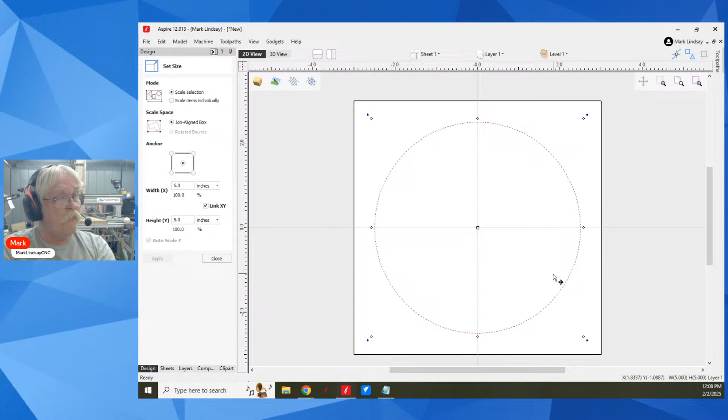He also said he wants to cut a 3/8 of an inch deep, 3/8 of an inch wide slot. So for you metric folks, that is about 9.5 millimeters, 3/8 of an inch.

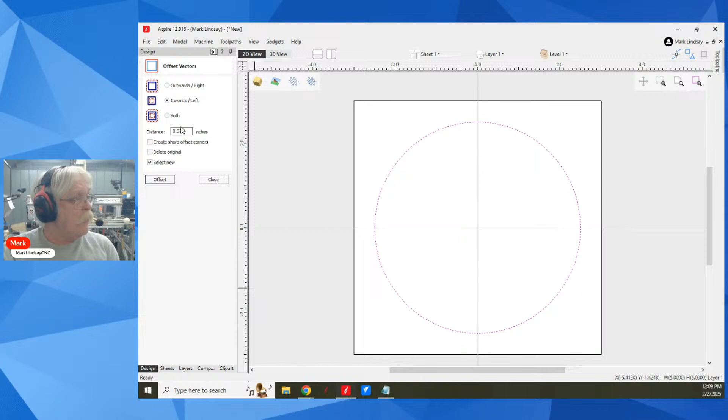So what I would do to help regulate and get my cut depth, I would offset this circle by the depth that I want to cut. Now, he wants to come in that 3/8 of an inch, so I'll offset that vector inwards by 3/8 of an inch, 0.375, and offset.

So that would be, this is going to be kind of freaky here, just bear with me. This would show how deep that slot is cut.

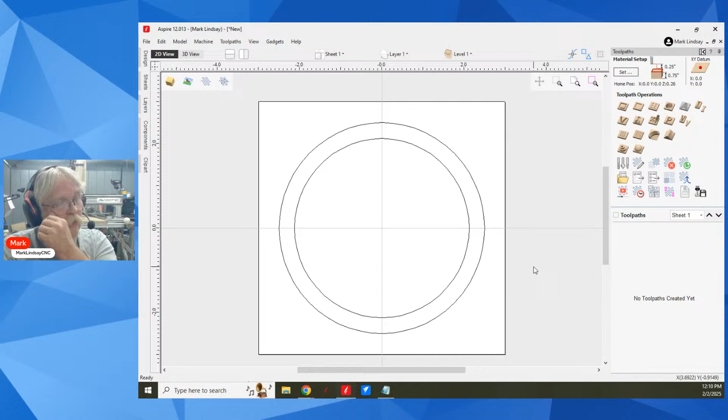So now we'll go over here and calculate two profile toolpaths. The first toolpath I need to run is a profile toolpath to cut this shape because I've got to cut it out of my material.

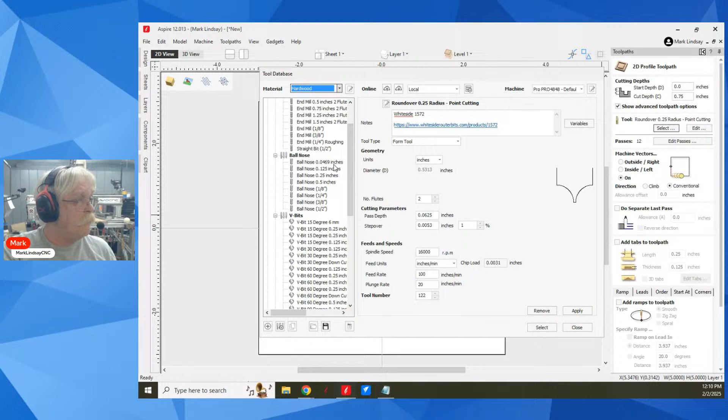So we'll go ahead and cut the full depth of my material. Z equals, and I'm going to use a 1/4 inch end mill. Select it. I'm going to cut to the outside of that vector. For this demonstration, I'm not going to do anything else, no separate last pass, ramps, or any of that other stuff. I'm going to call this cutout.

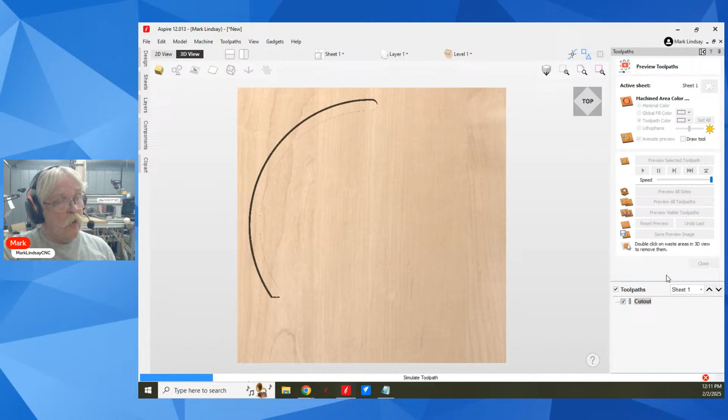And we'll calculate, and we'll go ahead and preview it. Now, with that piece cut out...

Just for my own sanity, I would probably do a little bit of creative material mounting here. I would probably also cut my axle hole right here.

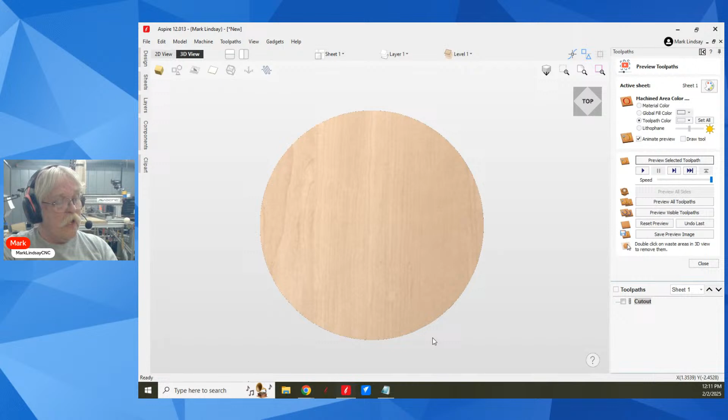Then when it comes to mounting the piece, what I would do is mount another block of scrap underneath it, say something like this. I would mount this to the table, then take a screw and drive it through the center of that axle hole and screw it down onto this piece of scrap.

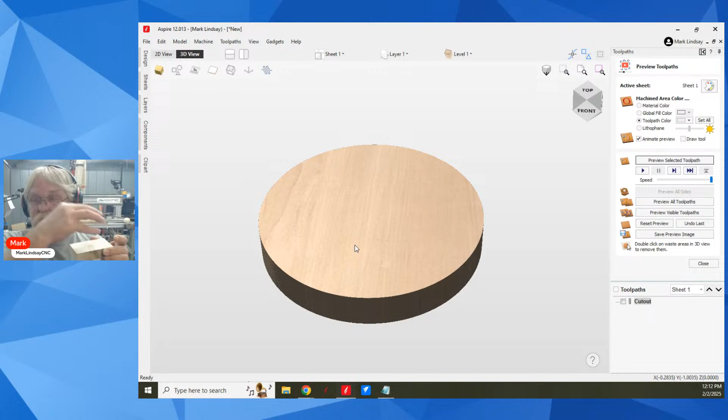That is so this bottom edge here is up off of the table, just in case.

So with that done, now I need to select this vector, and I'm going to create another profile toolpath.

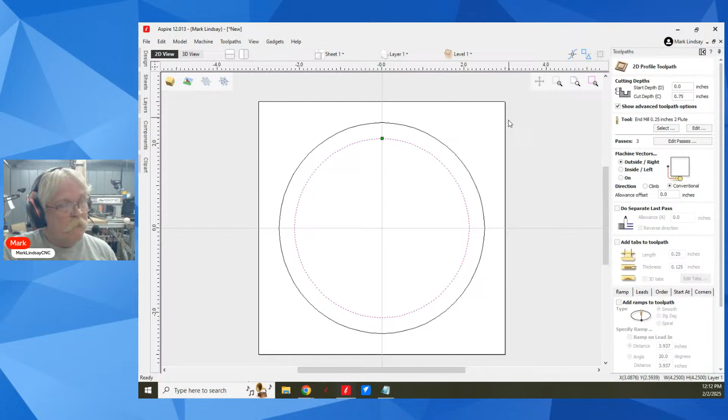Whoops, I'm sitting here trying to rock my 2D view, and I can't do that. Here in the 3D view, this piece of material is 3/4 of an inch thick. The slot is supposed to be 3/8 of an inch wide, as well as 3/8 of an inch deep.

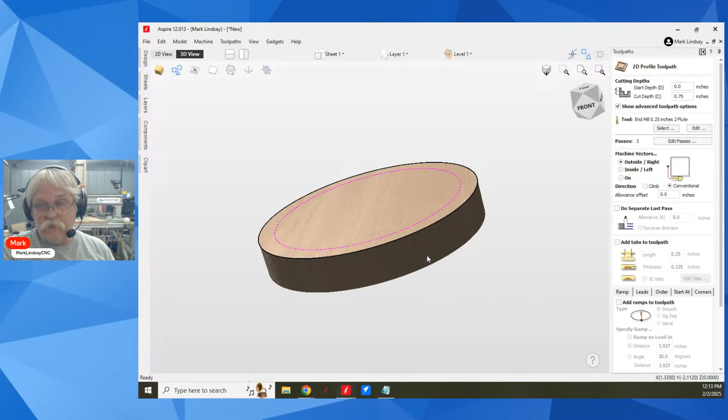So what I need to do, 3/8 is half of 3/4. What I'll need to do is divide that 3/8 in half, which is 3/16 of an inch. I'm going to leave that much of a rim here and that much of a rim here. The reason I'm bringing this up is because this is going to determine my start depth. So my start depth is going to be 3/16 of an inch. I want this bit to come down and start cutting down in here. I don't want it to cut from the top.

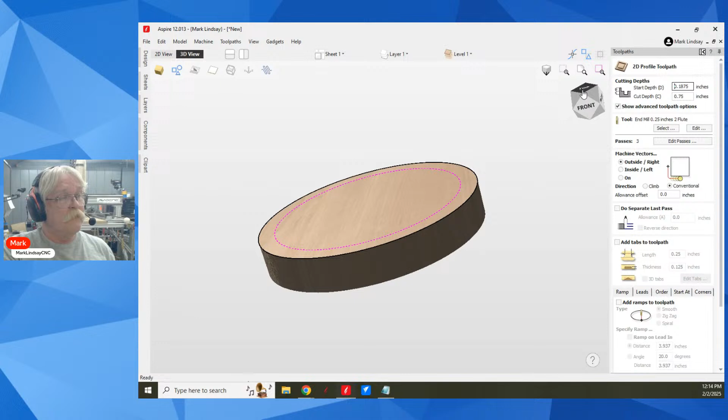So I don't remember the decimal equivalent of 3/16. Thank you, Vectric, for giving me this calculator. 3/16 equals 0.1875. So the bit's going to come down and start cutting 0.1875. We want it to cut 3/8 of an inch deep from here. So go 0.375.

For the bit, I have mocked up that Whiteside bit in my tool database as a standard end mill. Now remember, Vectric Software will not preview a bit that creates an undercut. It will not display that. And that's what this is going to do.

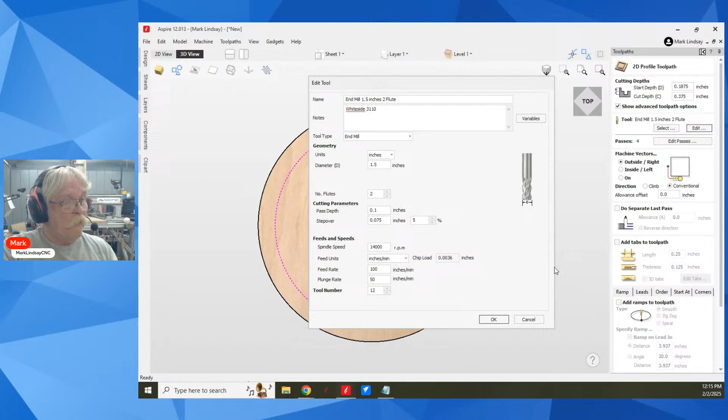So I'll select that bit. Let me go back into that. Nope, cancel. Let me go back into this bit because this is something that is going to have to be paid attention to.

It's going to be a little bit weird here because we're cutting in from the side. That is actually our cut depth. We want it to come in 3/8 of an inch, but we have to think about how much material we're cutting in per pass. It's not going to spiral in to our cutting depth of 3/8 of an inch.

It's going to come in and cut a little bit, go all the way around, come in more, go all the way around. That's going to be controlled by the step over. So we're going to have to use a very low step over until we get used to this bit.

All right, I've got a step over set of 5%. That is 75 thousandths. We'll see how that bit cuts. I may bring this up, let it cut a little bit more, or I may take it down and have it cut a little bit less. But the step over is what's going to control how much material it takes off as it's cutting in from the side edge.

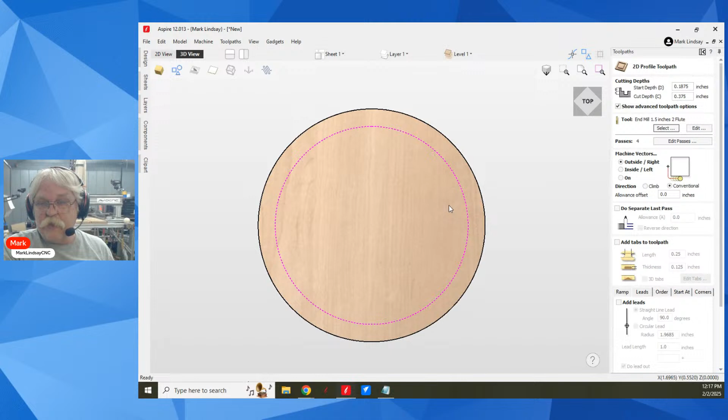So we'll close that. I'm not going to do a separate last pass, but I am going to use a lead. This is where we get it to start cutting, say, out here and move in without dropping straight down through the material here.

So I'll add a lead, and I'm going to use a circular lead. For a radius, I'll use a 1-inch radius. My lead length is going to be 1 inch. I'm going to do a lead out with an overcut of 1 inch.

No, I need to account for the diameter of the bit. So my lead length is going to be... I'm going to leave that alone. My lead length is going to be 1.5 with an overcut distance of 1 inch. I'm actually going to be working with the radius and not the diameter. Yeah, we're okay there.

And now I'll rename this slot. Now it's going to cut 4 passes. That's fine.

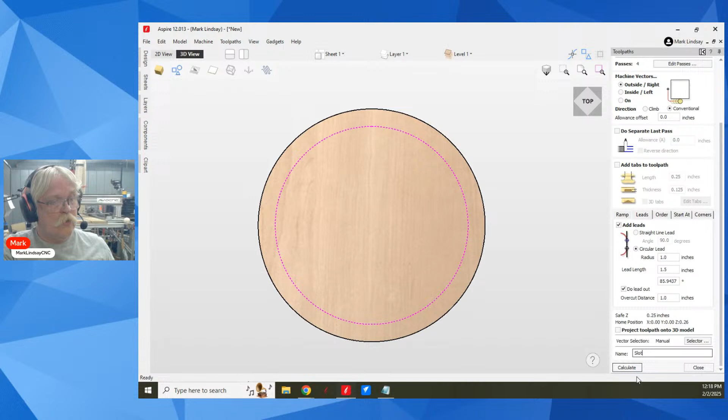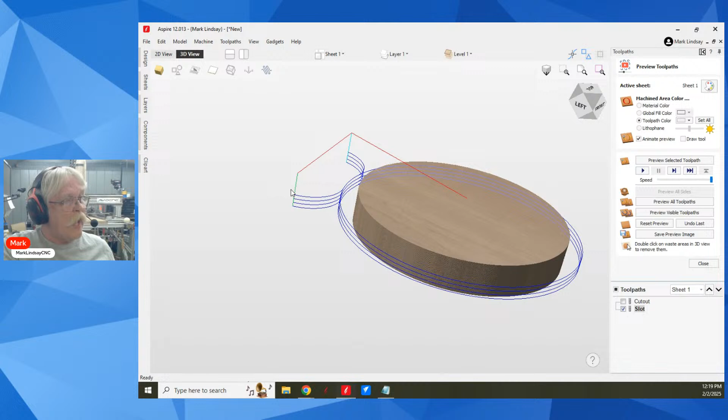Now we're going to look at this toolpath, calculate it. Here's where it goes. Let's tip it up, move it around here. Now remember, light blue are plunge moves, the green are retract moves. So what it's going to do is come down to its first cutting depth, its first pass right here, and cut inwards. Then it's going to retract out, go all the way around, come out, lift up, go back over, come down to the second plunge, and do that for all 4 of these passes to cut this area right here.

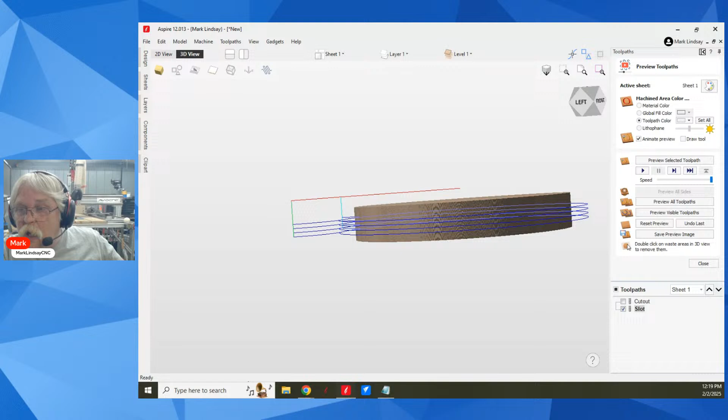Now, let me go here. Let's see. Why not cut around the circle deep enough for the slot cutter to be able to drop near the wheel, leaving it connected at the bottom?

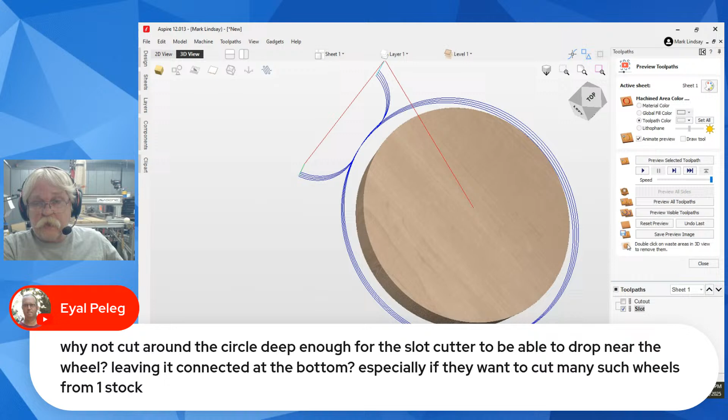Well, you could do that. But remember, this cutter is 1.5 inches diameter. That's you're going to be cutting a wide pocket around it. You certainly could, but you're going to have to cut a 1.5 inch wide pocket around that material if you want to leave that there. Now, I get your point, especially if they want to cut many such wheels from one piece of stock. Yeah, you certainly could do that. The whole point of this is using the leads to get the bit where the bit starts away from the edge of the wheel that you want left there.

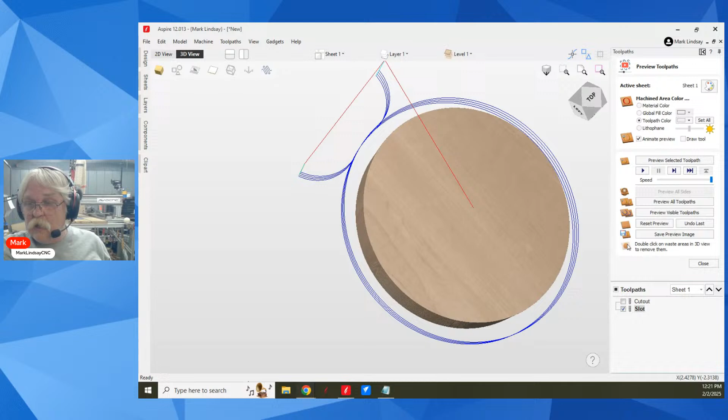Jay Scotia, don't you need to account for the width of the cutter? If the cutter is 1/4 inch, you need the top of the cutter 3/16 below the surface. Yes, you're absolutely right, my mistake there. You do need to account for the width of this cutter edge right here, and according to this, it's 1/4 inch.

So I would need 3/16 plus 1/4. See, this is why I would check it out on scrap, because I don't know if it's going to start from this edge or this edge. Probably this edge. So yeah, there's a lot to figure out.

Would it not be safer to cut 2 pieces with the right size pocket rabbet on each side and glue them together, creating the groove all the way around? I'm with you, Alan, that's how I would do it. I would cut 2 pieces.

A jig would be a benefit since this needs to be repeatable. Drill the axle hole first on the drill press, then mount the blank to the jig using threaded rod in the jig. Yes, yes.

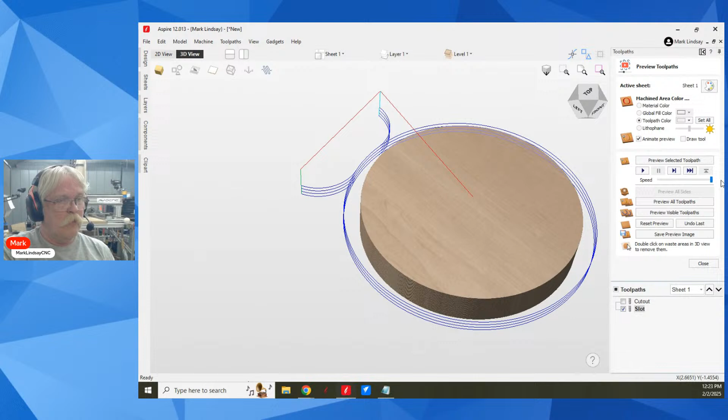Nope, wrong one, that slider there. And we'll draw the tool and we'll preview this. The bit's going to come down, then move in.

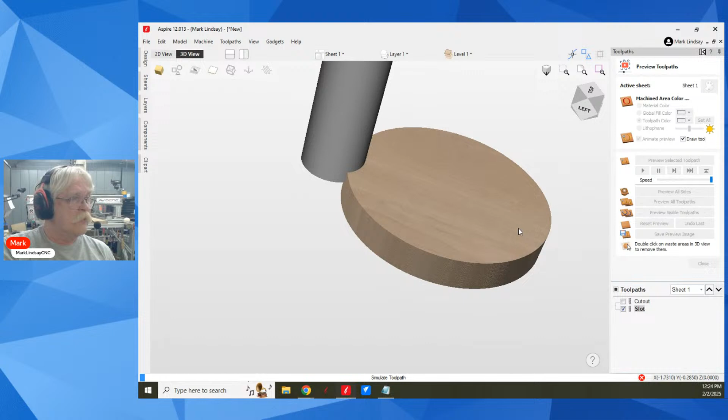Well, I can speed it up a little bit faster than that. There's a lot going on right now. And again, it's not going to display anything with an undercut, but you see, all right. Yeah, I can see the depth it's cutting now. And go for it. All right, let's go ahead and stop it. That's moving way too slow, it's got too much stuff going on here.

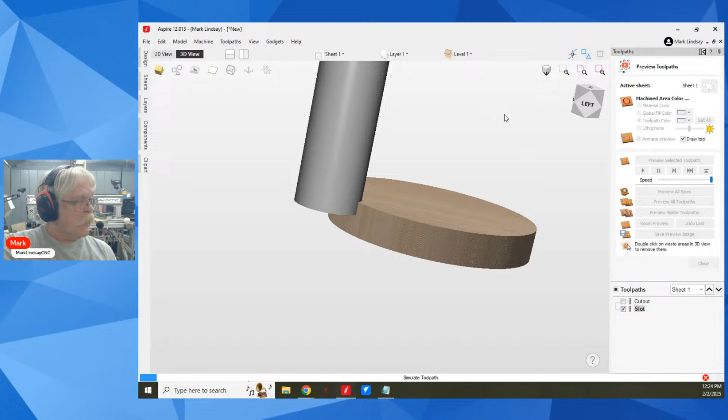Come on. You can stop.

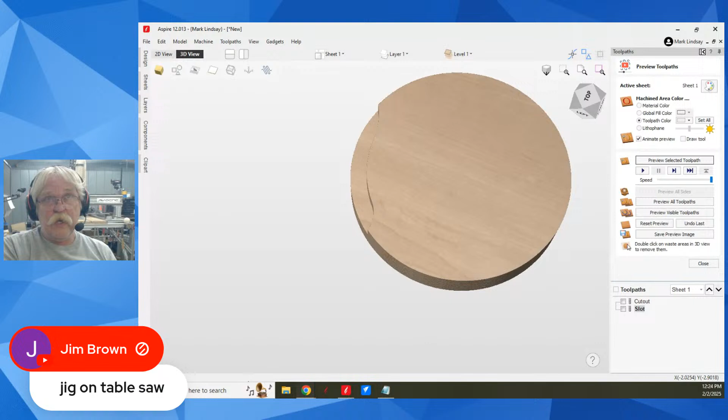Router table, yeah. Table saw, possibly, if you rigged up the right kind of jig, you could stack up a 3/8 inch dado stack and run it. But I think the 2-piece solution would be better for me. Just my opinion, and I'm nobody.

I would prefer to cut it in 2 pieces, just resaw it. But overall, in general, using leads.

Now, I almost said something stupid. Using leads is a way to get a bit to start away from the material, plunge down to the cutting depth, then move into the material, cut its way around, then move out without lifting up while it's in the material.

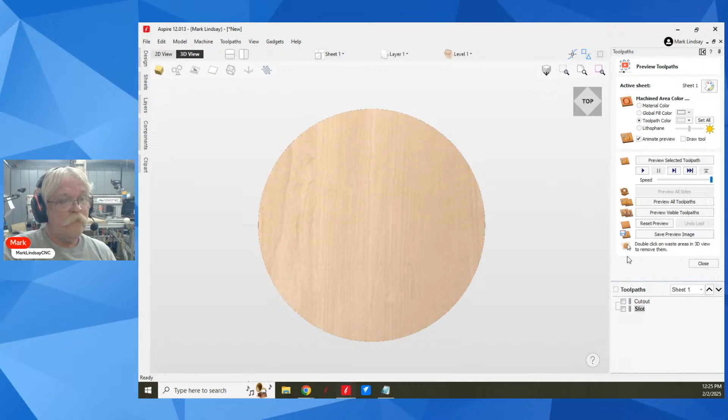So, that's the name of that tune. That's how I would do that. Again, I think I would prefer to just make them in two halves, rabbet in one half and pocket in the other, then glue them together. Yeah, that's how I would do it too. I mean, it works for semi trucks.

Let's see, I saw a question up here. Okay, Tommy Bledsoe: I worked until after 3 a.m. this morning figuring out how to fix overlaps in vectors. I accidentally exited the program and lost everything I had done. Is there any way to get this back?

The short answer is no, there isn't. When you exit the program, it should ask you if you want to save it. Yes, you should save it. Save early, save often. They don't have autosave.

And they have no plans on adding autosave, simply because in a situation like this where we've got a relatively small file here, this would just be a few kilobytes, we've got 2 vectors and 2 toolpaths, autosave wouldn't really be much, it wouldn't really be a problem. But if I had a complex 3D model out here with 13 or 14 or 15 components over here, and autosave kicked in...

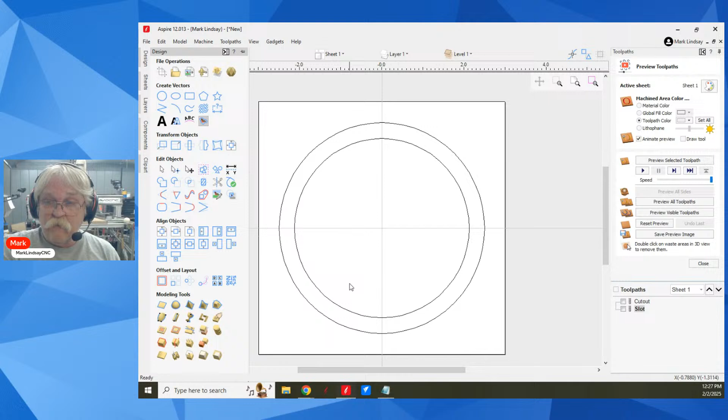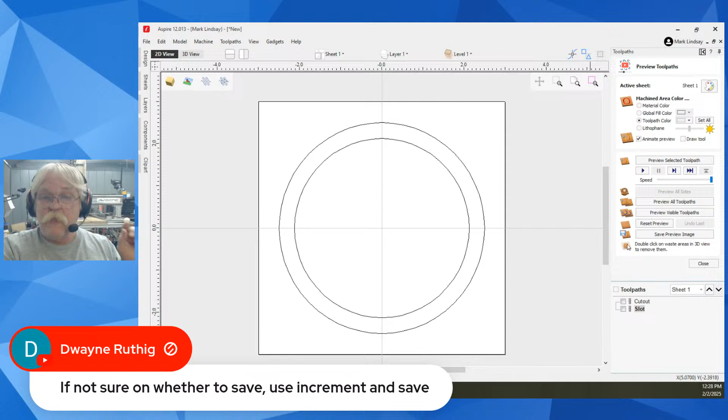Yes, they could make it so autosave could be turned off, but they've just decided it would be easier not to include autosave. And Dwayne is 100% right—if you're not sure on whether to save, use increment and save. All that will do is save the current state of your project without changing the original.

Alright, so let's go ahead and take that out. Yeah, I agree 100%. It would be very easy to program and get that done as a 2-piece. So let's see here.

John Thumb, welcome back. Would you not recommend an ATC for a new CNC person? It's difficult to use. I don't know that I would say I wouldn't recommend it. It's going to add some complexity. If you've never used a CNC router, it's the setting up, I think, that would add complexity. But that's, I mean, you know your skill level. If you're mechanically inclined, and if you're thinking about getting a CNC that has an ATC or as an option, I would say go ahead and get it if it's an option for your machine and within your budget, because it's optional whether you use that ATC or not.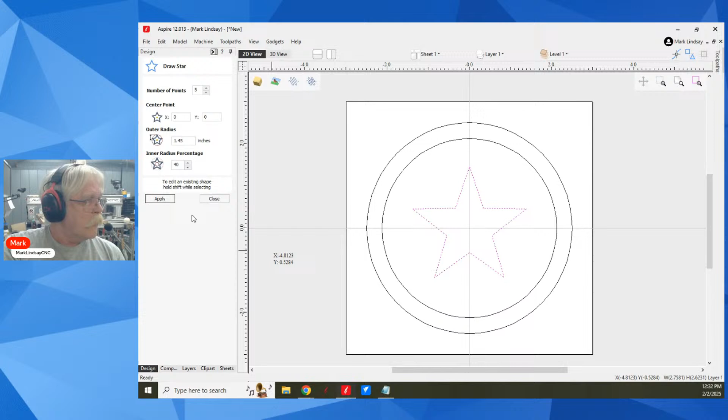Let me go ahead and close that, flip over here. We'll add a star—Captain America, there we go. Now I'll save as, and I'll just put it on my desktop so I can delete it when I'm done. We'll call it Star Wheel, and save it.

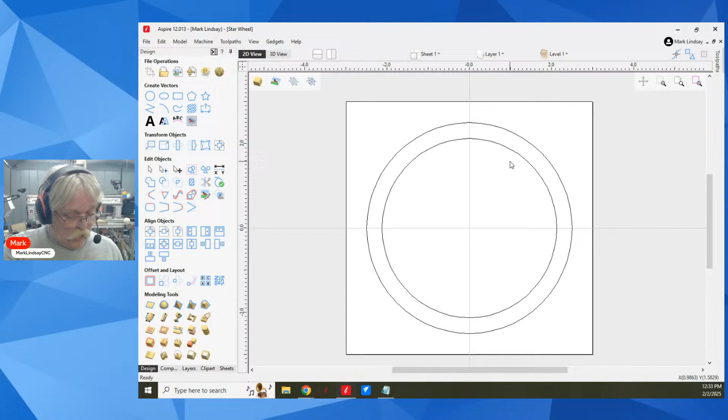Now, can I Control Z and remove that? Yes, I can undo it. Control Z again—that undid that offset. Control Z again. Now, I have changed it, but it's saved in that original form. So undo still works even after I've saved it. Now I'll Control Y to bring all those back. And there we go.

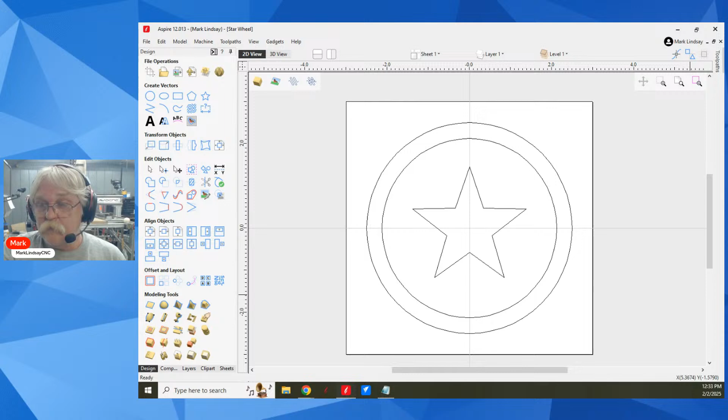Donovan says, I'm working on adding an aftermarket ATC and it can be a challenge. Yes, yes. Pete says an ATC can be an excellent upgrade for production work or if you have to do a lot of tool changes in your projects. Yes.

I don't want an ATC, I don't need an ATC. I don't do production work—everything I make is one of a kind. I may do 2 or 3 copies depending on what the kids or grandkids want, if they want one all of a sudden. For instance, I made breadboards a couple years ago for Christmas, all the same shape, but I only made like 4 of them. I still have that file if I need to make 3 or 4 more. But it's not really super necessary, I guess. So I have no desire for an ATC—it would just be overcomplication. I would have to bring in a compressor to use for the ATC, and I don't have space for it. Just a lot of things. I don't even have space for an ATC, I don't think.

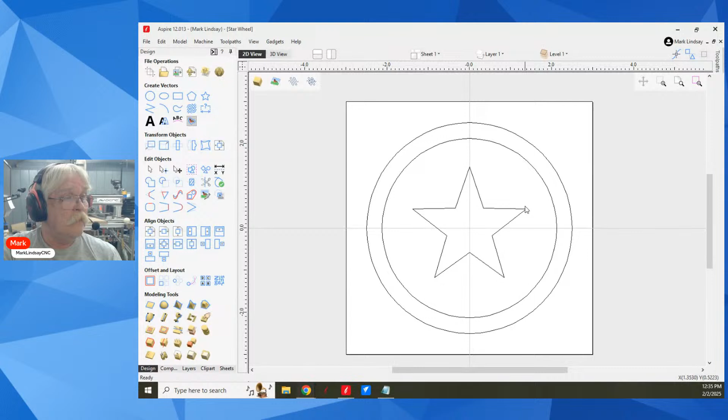Let me get rid of the star here. Could delete that. And I'm going to move it to a new layer.

Just call it layer 2, and I'll leave it the same color. Come up and I'll make layer 1 active, turn off layer 2. I've got a 5-inch diameter circle. You're using VCarve Pro.

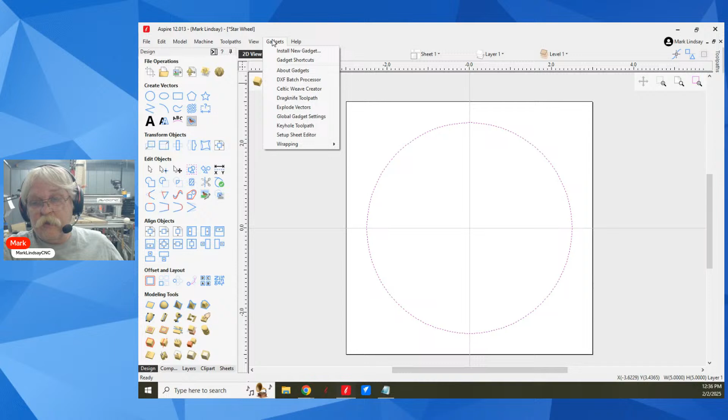Okay, good. I don't know if you went in and found the spiral gadget. There is a spiral gadget. I don't have it installed.

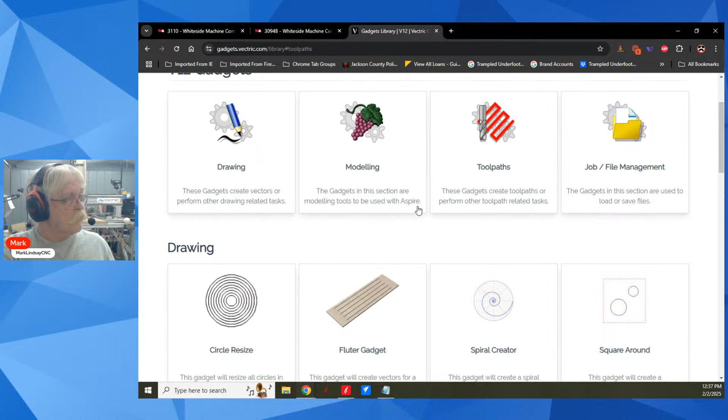So I'll go to... let's see, I'll start a new one here. I'll go to Vectric, Gadgets. There's the V12 gadgets. And we'll come down here, and I want to use a Toolpath gadget. And maybe it's not a Toolpath gadget. Which one is it? Not circle resize, not fluter. Drawing, maybe? There it is, the spiral creator.

All right, so I'll click on the spiral creator. I'll download the gadget and put it in my downloads folder. Oh, it already exists. It must be... okay, cancel. I must have it in VCarve Pro but not in Aspire. Well, there it is, that's how to get it. So go to Gadgets, Install New Gadget. I'll go to my Downloads folder. Aha, Spiral Gadget. Open.

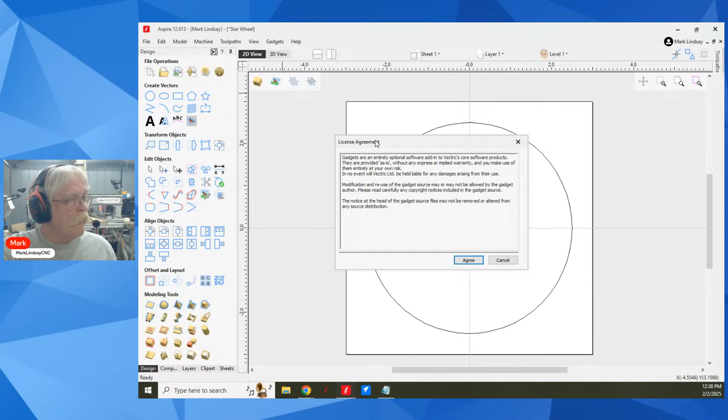Okay, I agree. Gadget successfully installed. Go to Gadget, there's my spiral gadget. Now, where do I want my... no, it's not under wrapping, that's a different spiral gadget. This is for doing flat spirals.

Where do I want my anchor point? I want my anchor point to be in the center. Okay, you're going to have to play around with which you like: the golden, involute, Archimedes, or logarithmic spiral. They are different. Unfortunately this preview window doesn't tell you what these are. Okay, now here's the width in X. I want my width to be 5 inches. How many times around do I want it to wrap? I don't know, let's look at this and see what it does. It went 3 times. Now we'll close it.

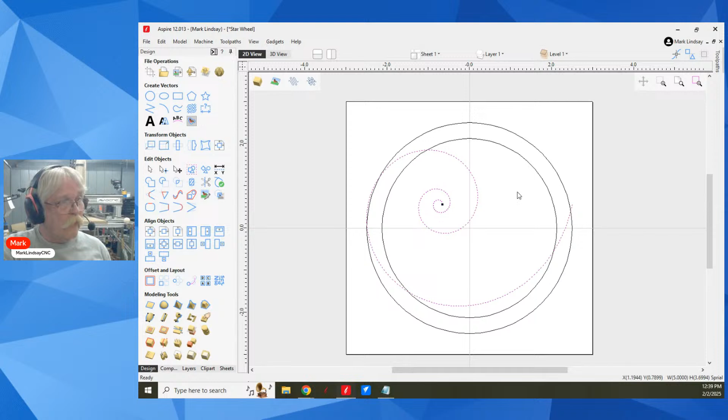That's not the kind of spiral I want. So Control Z to undo. Whoops, wrong one. Control Y, redo that. Let's delete that spiral and see what. Gadgets, spiral, leave the same settings. Let's try an Archimedes spiral. Apply. There we go, that's better. Don't know that it is better.

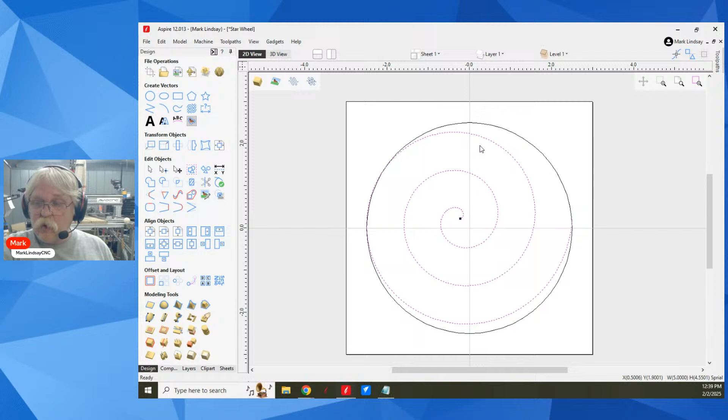But that's going to help you figure out a spiral. I think I would do a few more turns than just 3. Gadgets, spiral, let's go with involute and let's go 6 times around. Apply, close. Well, that went way outside the lines. But that's okay if you're surfacing. So...

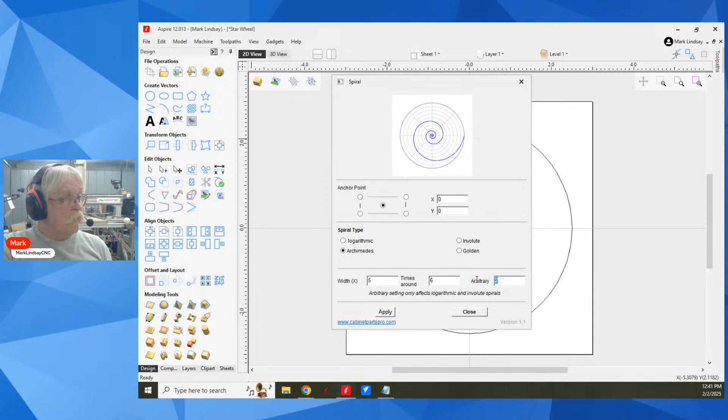Why does it not start at the center? Good question. Probably because of the type of spiral I selected. Spiral gadget, and let's go with a golden. Apply. Nope, that's even worse. And spiral, I believe it was the Archimedes that did the best. Okay, apply that, close it. Yes, that did the best, the Archimedes spiral.

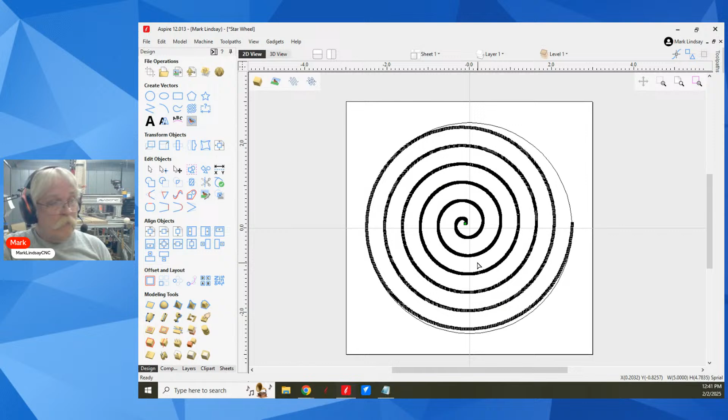Maybe you should move it post creation. Yes, you can do that. This one started close to the center, but you can get into it and click on node editing. Look at all the points. So you can get in and adjust all of this, believe me. Let's see what happens if we do this. Preview, that would be so much better, a lot fewer points.

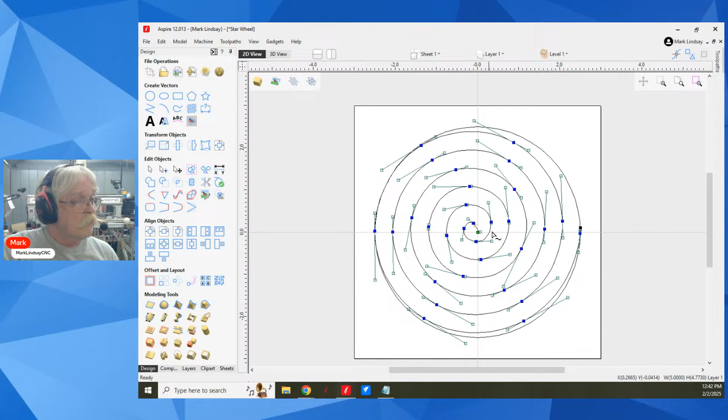Boink. And then go into node editing and you can move things around, tighten things up. Even... we're all right there. But that could all be node edited. It's just making that initial spiral.

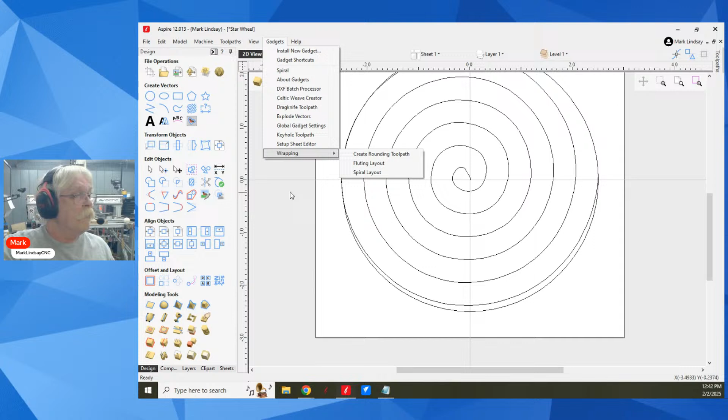You have the spiral gadget, and it does help. Now as far as getting into wrapping, there is a spiral layout, but remember this is for the spiral on the rotary axis, so two different things. I just meant moving the entire vector. Yes, I know that, but you could also move individual points was my point.

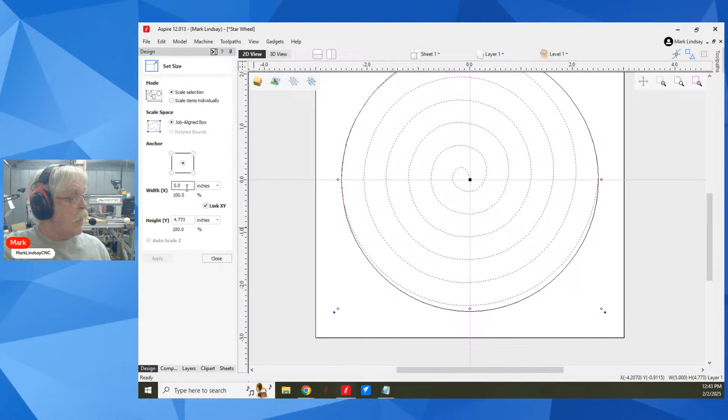Can you move the spiral vector to the center point? Yes, absolutely. Once you've created this it's just like any other vector. You can move it however you'd like, bring it down, bring it over, resize it, do whatever you need. I could resize it, it's 5 inches by 4.773. Let's make this 5.5 so that it is bigger than the whole thing. There we go, close.

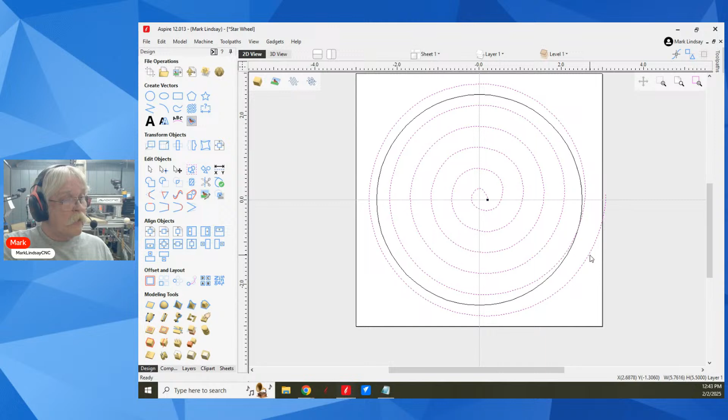And now I'll need to scoot it over like so. And we'll go back into node editing, make this the start point. So it starts off of the cookie and then comes in and spirals towards the center. So all kinds of little things you can get in and do.

Personally, I prefer plunges to be off of the material when I'm surfacing. I surface along the Y, moving up and down this direction. I prefer my X moves to be made off of the material as well, so that the bit just takes a pass this way, scoots over, comes back that way. So that's just me.

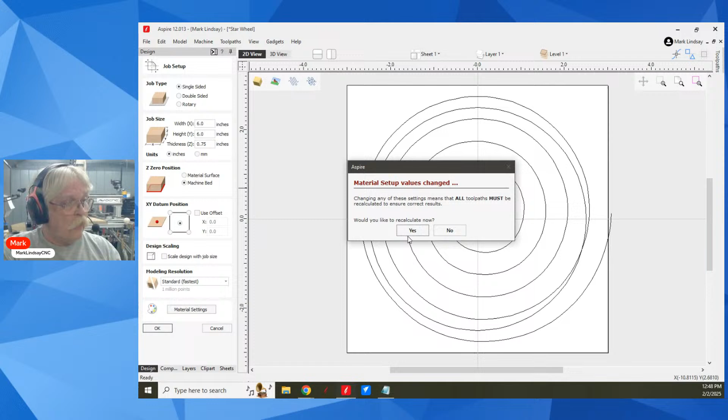The only thing you have to remember is that you set your Z0 to the machine bed. If you come here in the Vectric software in your job setup and you set your material to the machine bed, okay, it's going to tell me I need to recalculate. Yes, recalculate, yada yada yada. Okay, all the tool paths have been recalculated. Great.

If you do set it to the machine bed here, then outside on the CNC router, you forget and set it to the material surface, what's going to happen is whatever thickness you have here in your material, the bit is going to start cutting that high above the material. So it's not going to hurt. It's just not going to touch the surface of the material.

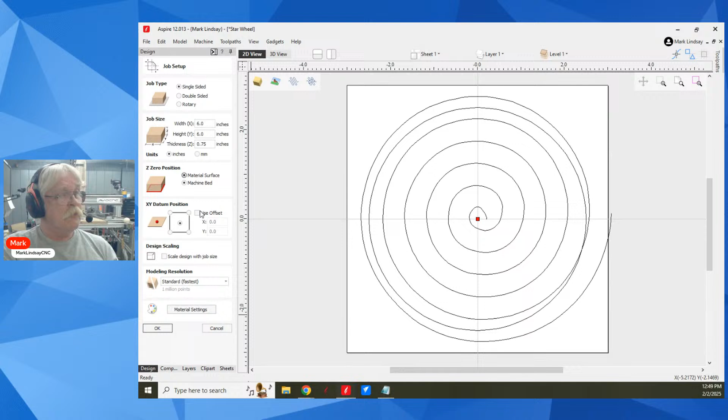The problem comes in is if you set this to the material surface, and you set your Z0 on the machine bed outside on the machine, now you've got problems, because it thinks that your machine bed is the material surface. It's going to go over and go through your material on its way to the machine bed. So you just have to remember which you actually set. Did I set this for machine bed or material surface?

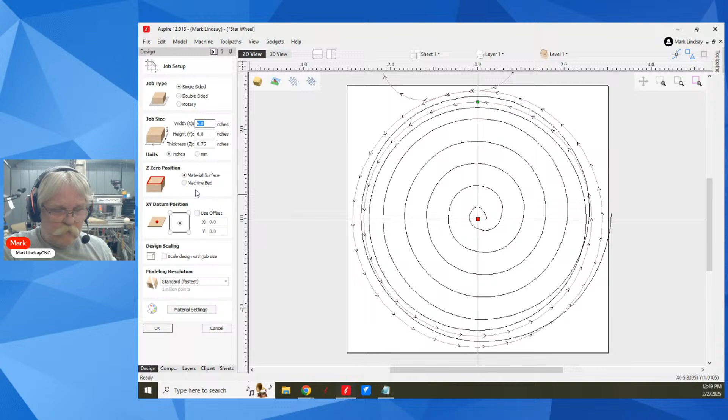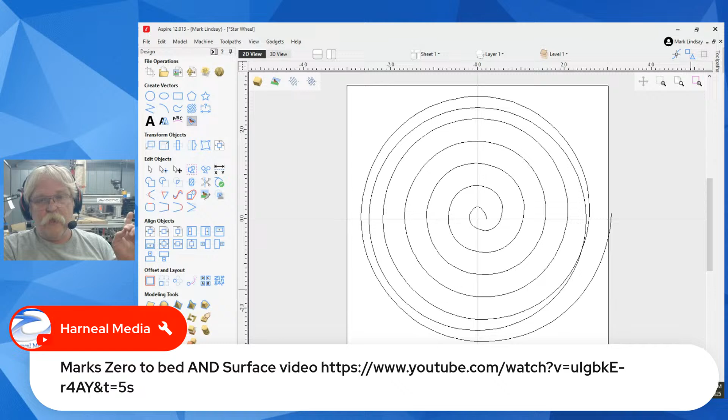So be very careful there, especially if you don't do it all the time. But again, I have two videos, and whoa, Steve being Johnny on the spot, there he is. That's zero to bed or surface, and that is zero to the bed and the surface.

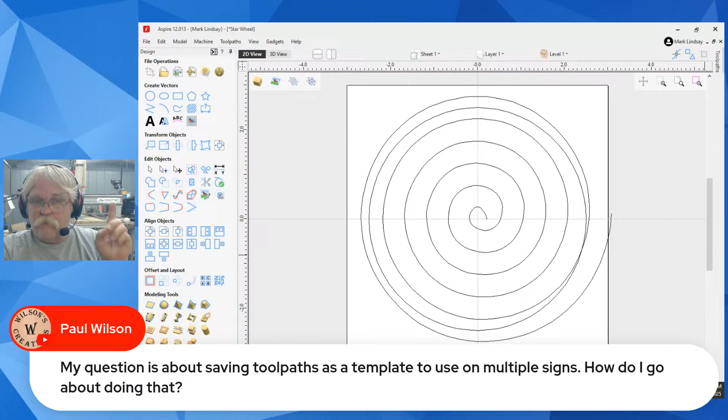I see your question, Paul, about saving toolpaths as a template. How to use on multiple signs. How do I go about doing that? I have a video on how to save a design as a template, but I don't yet have a video on using toolpath templates.

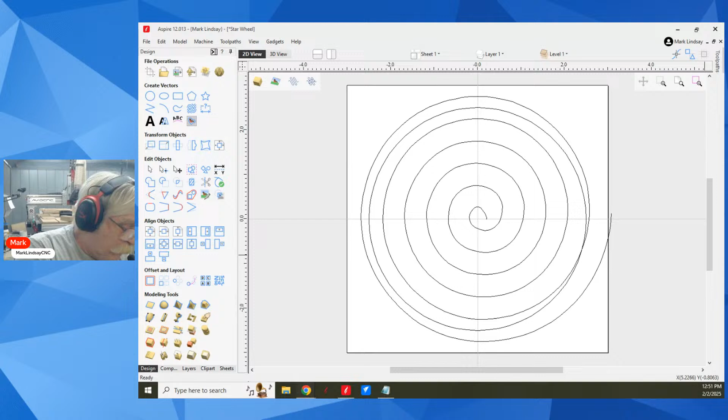I am going to be doing a video, and in fact, I'm not going to promise it next week, maybe the week after. That will be the first instructional video I do, toolpath templates. Because that comes in handy on a lot of things. Design templates are real easy. Toolpath templates are easy, but they have kind of, I won't say a limited application, but they are a little bit different. So I will do that video in the next couple of weeks.

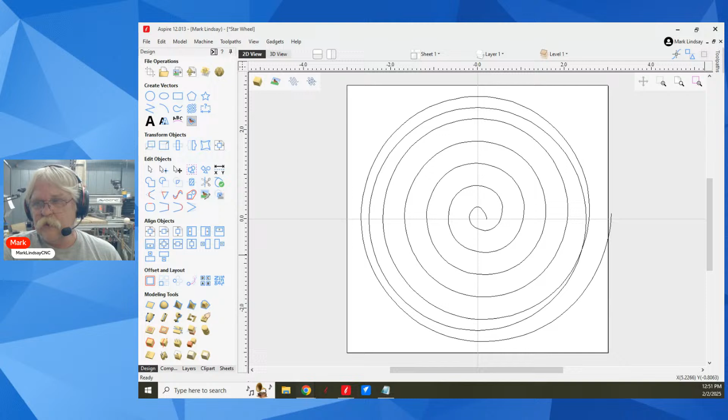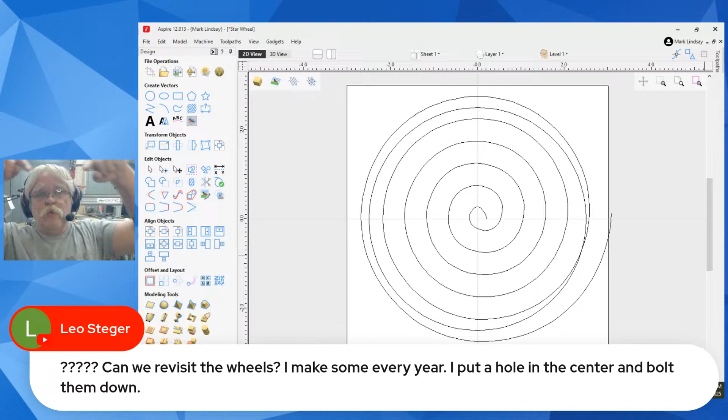Leo Steger, howdy. Leo is asking, can we revisit the wheels? I make some every year. I put a hole in the center and bolt them down. Yes. And then the question on the wheels was how do you cut the center for a rubber tire tread? Let me get rid of that spiral, I don't need that. And we'll bring back layer 2.

So layer 1 is spiral. I forgot about that. So what was your question, Leo, or did you not have a question?

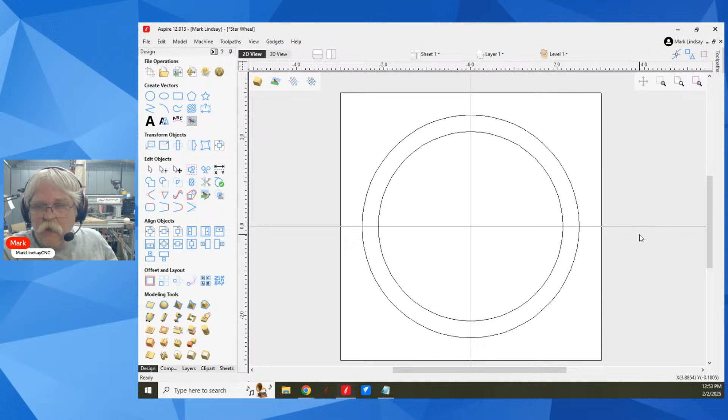My whole purpose in bringing up the wheel was to talk about using leads to allow a bit to plunge away from the actual workpiece itself. That was my entire point.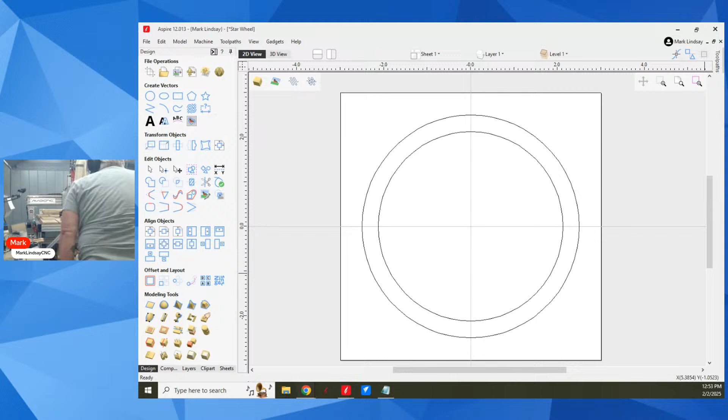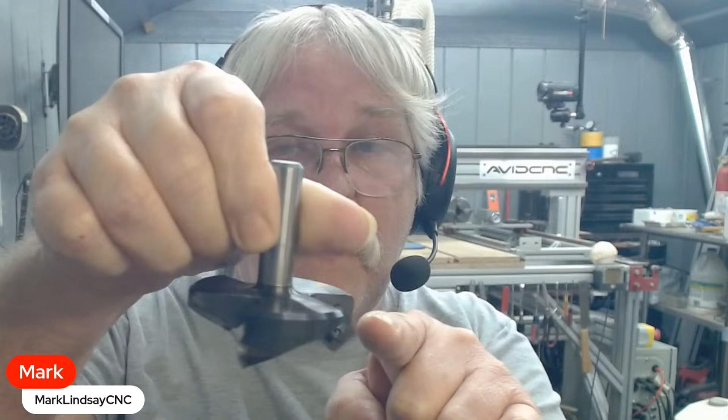Leo says he would use the slot cutter as I described. I don't know, Leo. Number one, I don't have a slot cutter bit. I saw somebody ask about a surfacing bit. My surfacing bit does not have that type of tooth. It's a 3-wing cutter that has carbide blades, so it's not going to cut in. I wouldn't use that type of surfacing bit. I don't know that a surfacing bit is interchangeable with a slot cutter. They're made for different things.

Having said that, I don't know. Again, you do this at your own risk. I'm not recommending anybody do it, or cut in from the side on that type of thing. I'm not saying it can't be done - it's obvious it can be done. It's done in metal machining all the time.

On smaller jobs, a keyway cutter could do that. Well, yeah, if you think about it, using a keyhole bit, that's exactly what you're doing. Jay Scotia says I would do it as Mark showed, but would use multiple passes with offsets to not go the whole 3/8 depth as one. Yeah, I agree.

Can I import a picture into VCarve? Sure can. There is an icon for that - right here, top row under File Operations, third icon is Import a Bitmap. Or you could go to File, Import, Vectors, or a Bitmap. Either one.

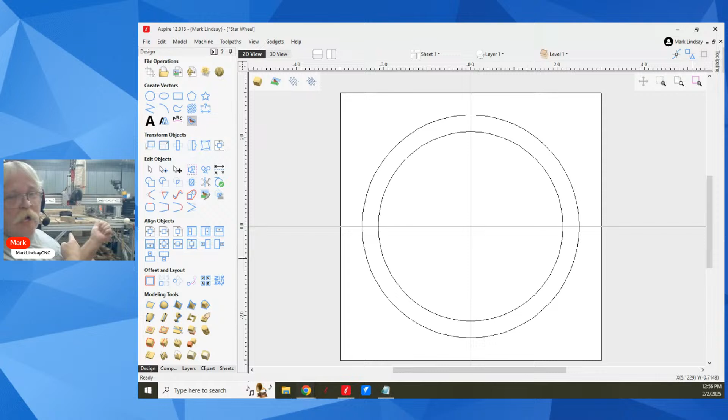Leo uses the cutter, however I use a Bridgeport mill. And like I said, it's done in metal machining all the time. But this is not a Bridgeport mill, so it's something most folks need to wrap their head around. And it can do it - it can certainly do it.

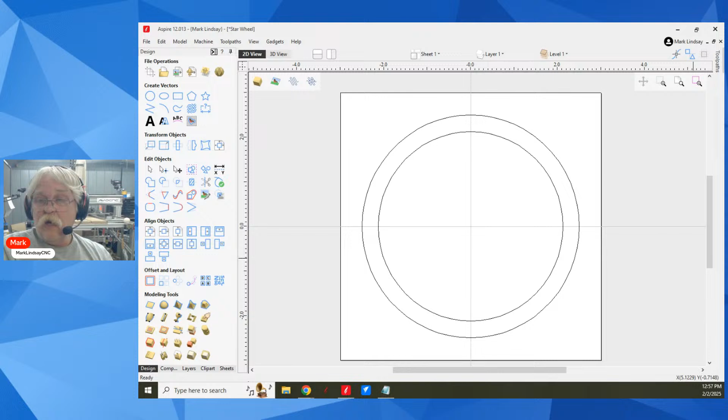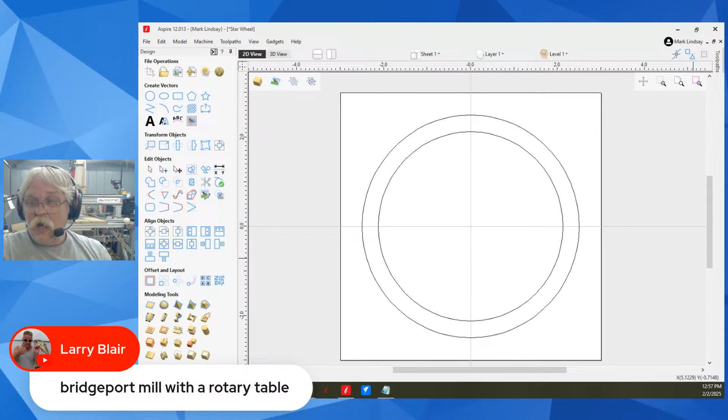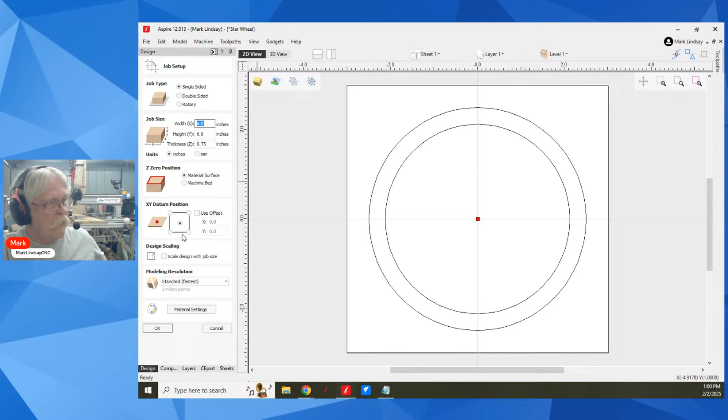Let me ask you about that. When you set up, are you using this? Where are you putting your XY datum position? I don't know, I've never been in your situation. Okay.

Let's say I'll cancel that. But I have my XY0 in the center. Let's go over here and say I want to tile this toolpath here. We'll go to tile toolpaths.

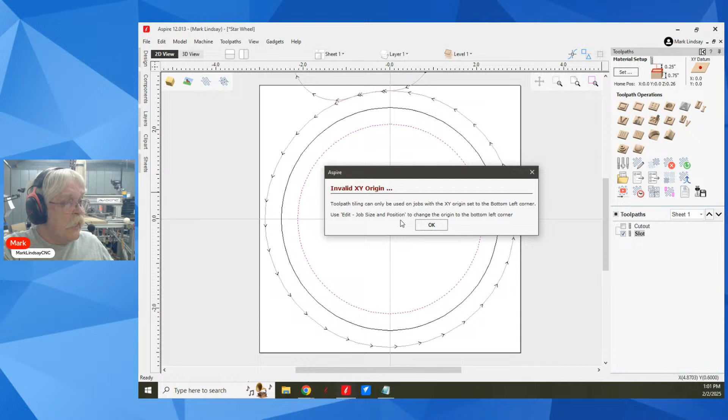Toolpath tiling can only be used on a job with the XY origin set to the bottom left corner. Okay, there it is. Use edit job size and position to change the origin to the bottom left corner. There it is.

No, I guess not. I thought maybe there was a way around it, to use like the top left or top right, but evidently not. It's flat out telling me it's got to be done on the bottom left corner.

Sorry. Okay, so I think that was it.

Michael Bernasconi is going to be getting into his framing for his fabulous laser work. I mean, these guys are killing it.

Bob says he thought he could swing the board around and get around it somehow. No, I'm sorry, not that I can find. And you are not the first person to wonder if they could put a piece of material in like this, cut this end, then flip it around and cut that end. Not using the tiling toolpath, they can't.

So, datum XY offsets, possibly, but you might have to fiddle with it. You can try that, but you are not the first person to wonder about that. And I imagine it's too long to go across your X, otherwise you'd have done that.

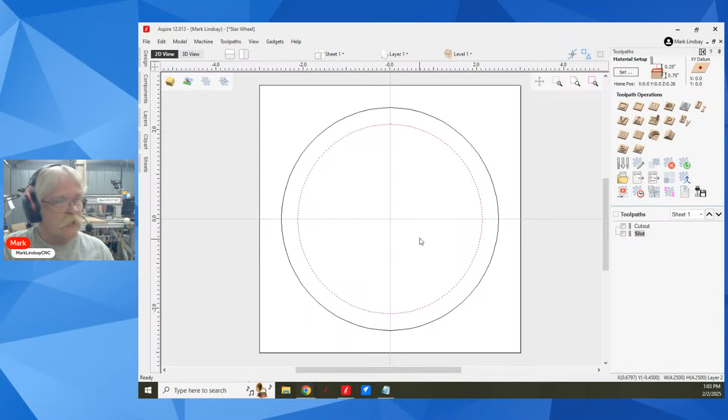Holy cow, is it possible for you to take that piece and cut multiple pieces and then assemble them later? Like, for instance, cut this tile as a separate piece, then cut this tile as a separate piece, then this tile as a separate piece, and assemble them later on.

Because you can do that. You still have to move your XY datum position over here, but you would have to cut them as separate pieces and then assemble them off of the machine.

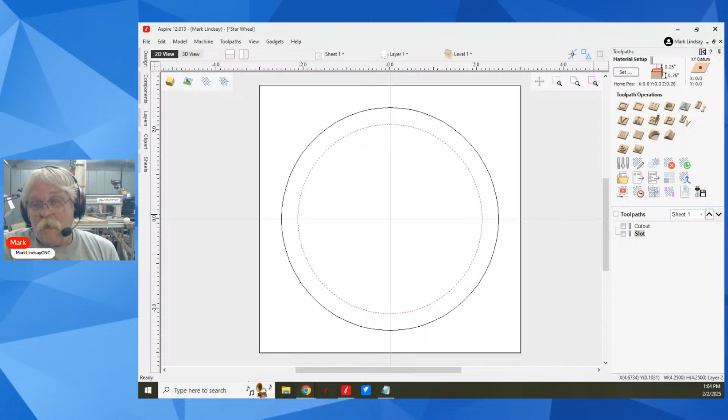Yes, but I was trying to avoid that. Well, either that or you're just going to have to knock out a wall. It's real easy for me to spend other people's money, but it seems to me you're in the same position I'm in, not enough shop. Sorry, sometimes you've got to throw your hands up and say dang it.

No, I'm not even going to say it. Never mind. I was wondering about cutting a pass through in the back wall of my shop. Anyway, I'm not even going to go there. Too late, you already did.